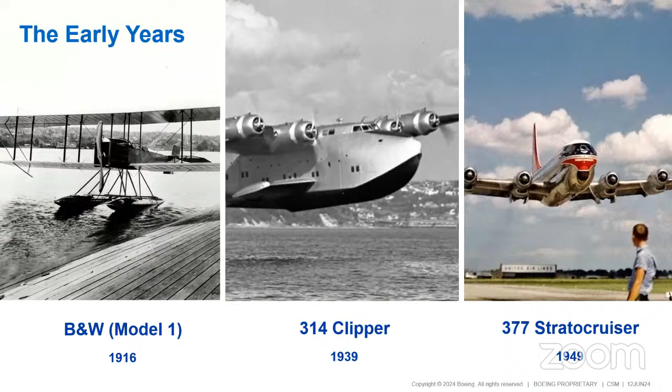So after the 1940s, when we came into the 50s, we came into what's called the jet age. When jet engines came to be and started carrying passengers, that's when Boeing really put itself on the map of the world to say, this is what we can do in aviation.

You'll see a lot of these formulas baked into all of our products that we'll go through today. Now, just to give everyone a sense of the commercial aviation market we play in, it's really just two manufacturers, Boeing and Airbus, as I'm sure you've heard. This is what we call a duopoly, where only two manufacturers exist in the larger pool. There are other companies that manufacture airplanes, but they're much smaller and don't produce nearly as many. So here on this chart, you see the size of the airplane.

In the middle there, you see two-class seating - that just means first class, economy class, and how many seats each plane can fit. The ones on the bottom are the smaller ones, like the 737, all the way up to the larger 777s, which carry up to 450 or so passengers. This is what I mean when I talk about making sure airlines have an airplane for every single one of their needs. We want to make sure all their needs are met, and we'll talk about each one of these later.

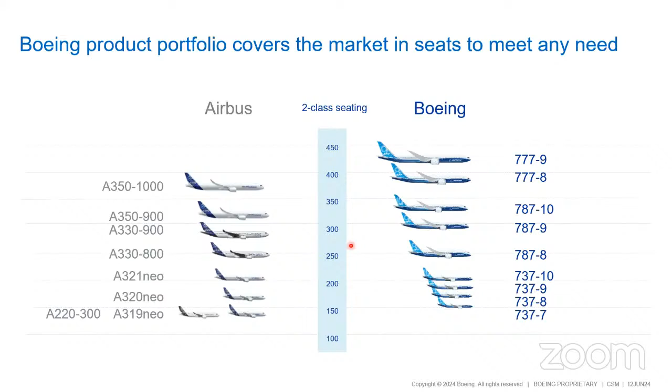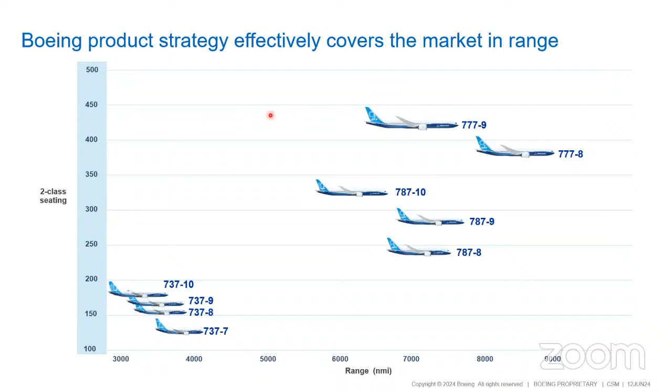Now, every airplane we make is based on three pillars. We want innovative products, the latest technology baked in to make them the most efficient machines in the sky. We want to make sure passengers remember their experiences with the brand, because a passenger can fly on an airline and have a really, really good experience and say, I love that so much, I'm going to come back for more - or they can have a bad experience that prevents them from coming back. So we want every passenger to have an enjoyable journey. And lastly, aviation is a business - we want to make sure airlines are using our product to maximize their profit potential.

So let's go through the three products that we have. Remember, there's the 737 MAX, the 787 Dreamliner, and the 777X.

First, the 737 MAX, we call it the industry workhorse. Workhorse just means it's the airplane that will fly many, many times a day, all over the world, at all different stage lengths. It's the most versatile airplane of the bunch, and this is by far the most popular airplane that we produce and build the most of.

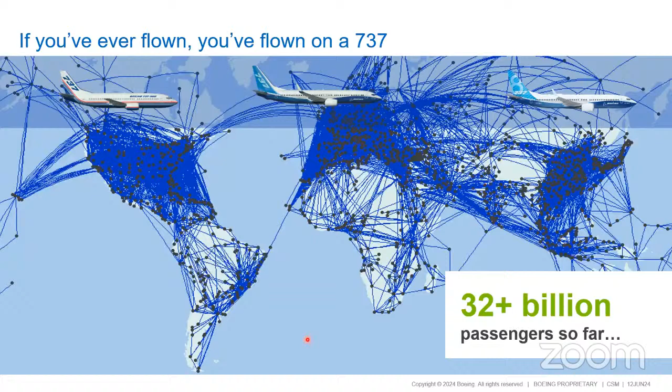You can see on this next world chart how many airline customers and air cargo operators also operate the 737. It's across every continent, every demographic, every business model. The airplane is so versatile, it really can fill the need of so many different airlines. So that's one of the reasons it's our most popular.

So if you want a very small carrier, not needing a lot of passengers, but maybe you want to go a little bit further, you get the 737-7. Or if you have a very popular route, you go for the 737-10, which will carry a lot more passengers. And then the 8 and the 9 in between. This is why we do families, to enable airlines to always be able to get the airplane that's right for them. Now, another reason we do families is commonality.

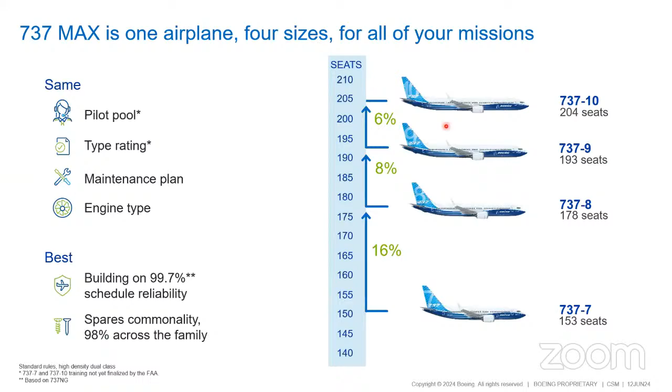And this you'll see is replicated across all of our airplanes. So let's go into what makes the MAX technologically advanced. A few big things: the 737 MAX is the latest version of the 737. From the prior version, we've been able to increase its fuel efficiency by 20%.

A big part of that is the LEAP 1B engine, which powers the 737, from a company called CFM. And then we have more aerodynamic improvements—these winglets that we put on here, which make the plane more aerodynamic and more fuel efficient, as well as a more aerodynamic shape of the end of the fuselage in the tail cone.

And then we have introduced a number of other new technologies to this airplane to bring it into the modern space. So every time we're looking at what's next, what do we need to do now, what is the thing that's going to make airlines more successful—we look at things like this and how to further better our products.

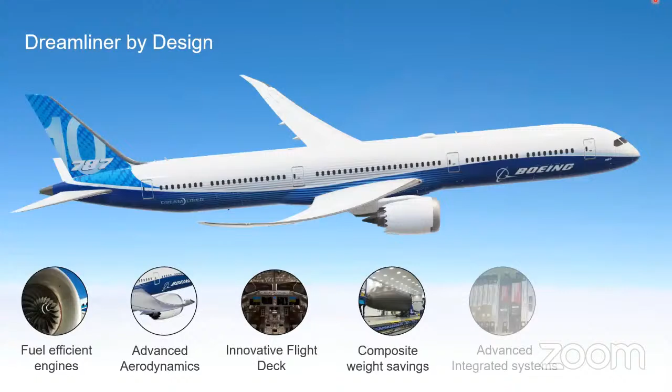I do like to talk about the technology of the Dreamliner because it is a very unique airplane. Most airplanes you'll fly in are made of aluminum, that's been the metal of choice for decades, ever since the dawn of the jet age. This airplane, however, is made of something different: carbon fiber composite. The entire fuselage, pretty much everything you see externally, the fuselage, the empennage which is the tail section, the wings, even the engine nacelles or engine coverings, those are all carbon fiber composite.

It is not aluminum. So there are a few benefits to carbon fiber over aluminum. One, it's lighter and it can be much stronger in a lot of situations. So we set out to build an airplane that's structurally about 50% carbon fiber composite. That's the biggest difference between this airplane and the other two we're talking about, and essentially almost every other airplane flying right now.

This airplane debuted in 2011, so it's been around for a while, but it's still very state-of-the-art, with advanced aerodynamics and some of the most fuel-efficient engines.

We of course love the cabin, as we saw on the 737 MAX, no different on the 787. But with the 787, we got to do a lot of unique things. We had to introduce things passengers may not see, but they can feel, like cleaner air, more humidity, a little lower cabin altitude. All of these things contribute to a much better passenger experience. Remember, the 787 is a long-haul airplane, we're talking 12, 13, 14-hour flights. There's a 787 that goes from London to Perth, Australia, one of the longest flights in the world currently. Having subtle differences like this may not sound like a lot, but it definitely makes a difference over that time.

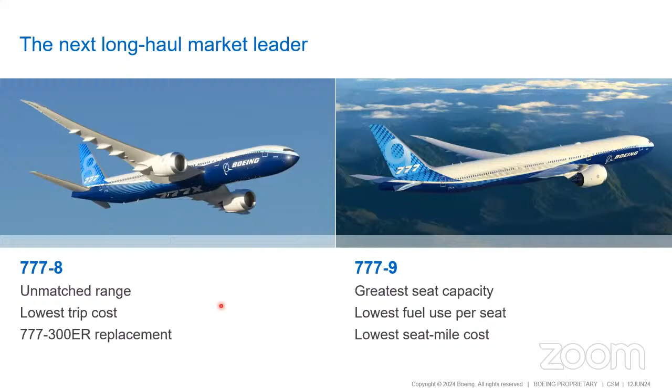Just like our other airplanes, the 777X is also a family. We have the smaller version, the -8, similar in size to our current 777 that's been in production a while. The 777-9 is really in a class of its own as the largest twin engine airplane flying. It just depends: do you need all the capacity of a 777-9, or do you want the smaller capacity to replace your 777-300ERs, which is the current 777 right now? The decision is up to the airline based on their needs.

Some of the really cool technology we put into the 777X actually grew from things we had on the original 777 and the 787. We were able to combine a lot of those things together and get the best of both worlds with the 777X.

Now, one thing you'll see in this picture that looks a little different than any other airplane we've built before are these things on the end. These are not winglets like you see on a lot of airplanes, which are fuel consumption reduction devices. No, these are actual wingtips that fold down when in flight and fold up when parked. You're probably wondering why we'd ever do that, since we've never done that before on a passenger airplane. But the key word is all about efficiency.

We gave the 777X a brand new wing. The 777 had a pretty good aluminum wing, but the 777X, the new version, we gave it a brand new carbon fiber composite wing, and we made it much longer. We increased the span, which means we increased the aspect ratio, which means we increased the efficiency of the wing. So this airplane will fly much more efficiently than its predecessor, purely on the aerodynamics of the wing. New engines help a lot too, but the 777X wing is very, very next generation.

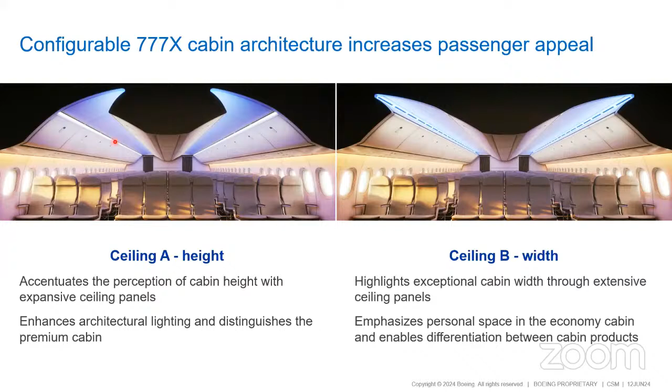We did that because our research found that physical space in an airplane can't really change, but the sense of spaciousness, psychologically, a passenger's sense of spaciousness can change with simple things like this. So it gives airlines the opportunity to configure their cabins, whether it's economy, first class, or business class. They can put in all sorts of different combinations.

We included a lot of the same things in the cabin from the 787 to make sure you have a very enjoyable flight. A lot of those things, though you can't see them, you can feel them, we incorporated into the 777X.

Another key aspect of the 777, and actually all of our airplanes, is sustainability - how do we lessen our climate impact and our carbon footprint with these airplanes? The 777X is very, very efficient, much more efficient than the airplanes it's replacing and comparable airplanes. On all the major emissions like carbon dioxide and nitrogen oxides, the two most harmful emissions that aviation emits, the 777X is the lowest producer of those in its class.

It's also very, very quiet. Even though noise is not an emission specifically, it's also very important when it comes to regulations. So really, the 777X has innovative features that enable you to operate at a very low cost, a cabin experience your passengers will never forget, and a profitable family for you to choose the best way to operate your airline.

Okay, so that is the end of the passenger airplanes. Now, that's what most people know Boeing commercial airplanes for, because they fly on them.

But Boeing also produces a family of freighters. The biggest difference between freighters and passenger airplanes - well, they look very similar, as you can see here - but there's no windows. That's how you can tell instantly a freighter from a passenger one, because boxes don't need to see all the cool things outside.

Now, when it comes to air freight on the global scale, it's not a large portion of that. Really, only about 1% of all freight is flown by airplane, but it's 35% of the value, because in some instances, air freight is your only option.

Think about Formula One, for instance. If you have a race in Singapore one week and you've got to get to Dubai the next week for a race, the only way you're going to get there with all your equipment and your car is by air freight.

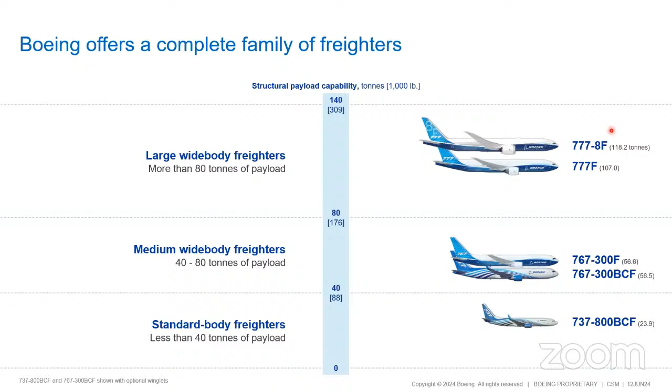In this space, and specifically the freighter space, it's pretty dominant from Boeing so far. Airbus is starting to gain a little share, and they've introduced a new freighter to compete with us, which we welcome. But currently today, most air freight flies on the Boeing freighter.

I'm just going to talk about our newest Boeing freighter, the 777-8F. The last airplane I talked about was the 777X. This airplane, the 777-8F, is the freighter version of that airplane, so it has all of the same benefits: the large span wing, the folding wingtip, all the new engines, all the advanced designs. It has connectivity to track your cargo. All the latest tech now brings to this freighter.

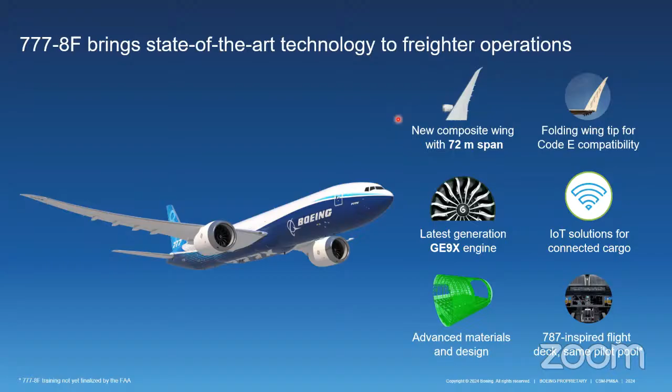That's really what's coming next for us to get into the next freighter space, to replace a lot of the older large freighters. It carries a lot of weight, especially 118 metric tons, nothing to write home about, nothing to scoff at. And of course it enables you to be more fuel efficient, more sustainable, and more profitable overall.

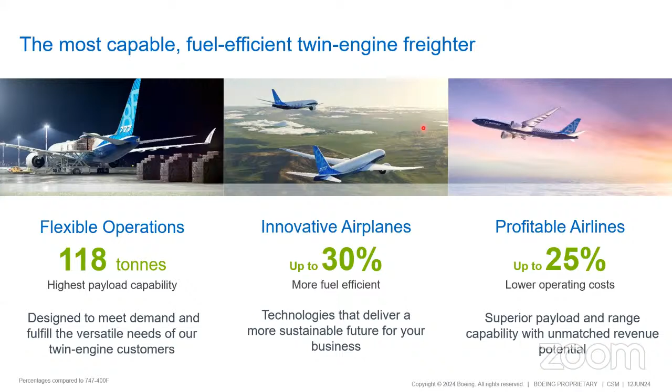I want to touch a little more on sustainability and how we are committed to reducing our climate impact as much as possible. One of the biggest ways we do that is through fleet renewal, meaning we make new airplanes much more efficient, therefore less emissions, even including emissions from manufacturing the aircraft that they replace. You can see on this chart that every airplane we currently offer, from the 737 MAX all the way to the 777-8F freighter, are anywhere from 20 to 60% better in either emissions or noise reductions compared to the airplanes they're replacing.

That's one of the biggest ways we're going to reduce our impact, because we forecast there's going to be a need for thousands and thousands of more airplanes over the next 20 years. So if we can replace them or use more efficient airplanes to fill those orders, that's going to be much better for our climate impact.

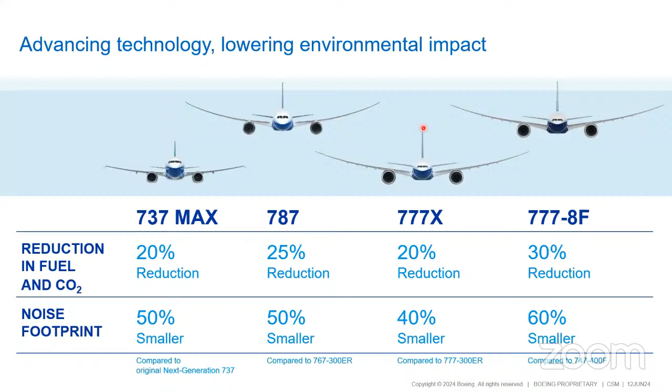We always are innovating, and one of the ways we do that from a sustainable perspective is we test a lot of new technologies on this airplane called the ecoDemonstrator. It's a 777 that we fly around and test new technologies, things like sustainable aviation fuel, more recyclable and reusable interior components, and other things to help test technologies that can be applied to future products to be more sustainable overall in every little way. Because for us, there's no small thing we can do — everything we do for sustainability is going to be a benefit.

One of the biggest things we're doing is partnering with NASA, the National Aeronautics and Space Administration here in the US, to come up with a demonstrator of a very different looking airplane — a proof of concept called a truss-braced wing. Most airplanes only have a single mono wing, but with a long, super-efficient wing like this, you brace it, and that can help reduce emissions by up to 30% because the wing is so much more efficient.

We're doing this on a test scale, so we want to make sure it's feasible — not only to fly, but to operate as an airline, to build, all those different things. We've been theorizing about this for a long time, and now we're actually going to build a full-scale demonstrator airplane to see what is feasible, what is next in the next great era of aviation.